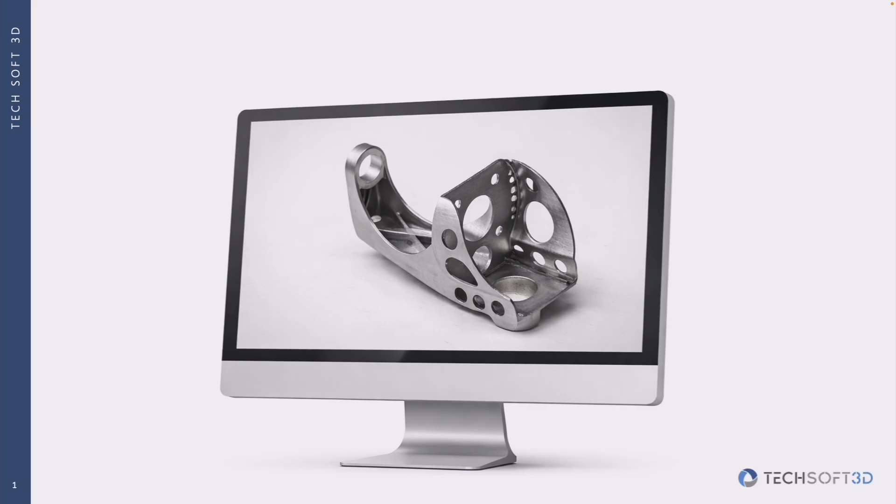Hi everyone. Before starting, I would like you to focus on this part and ask yourself the following question: what would an expert say about this part?

A 20 years experienced engineer could, within seconds, say whether or not this part is manufacturable. What will be the features driving the cost? What are the sourcing options? And what tolerance makes sense?

Most of the time this kind of information is available in PLM systems and other variants, but sometimes the information is unstructured. Companies are very happy to have this experienced engineer who can provide insight to the team within a few minutes. So I have a couple of important questions to ask.

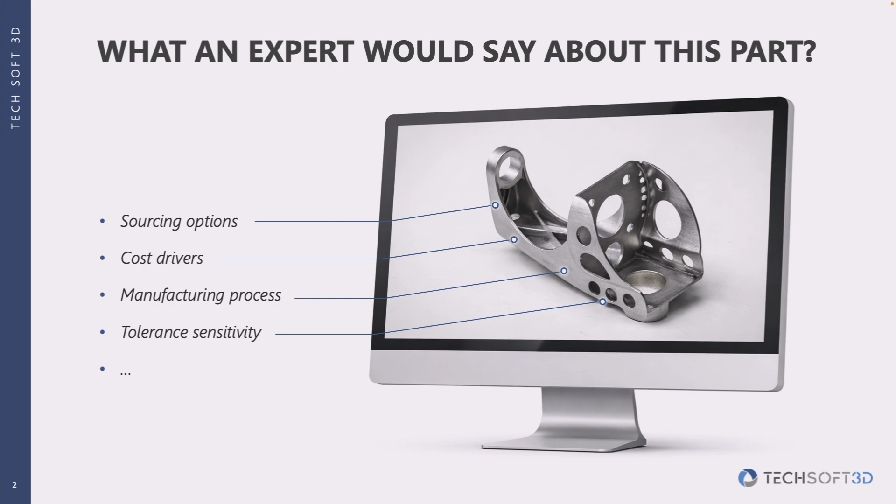How can we connect geometry to that business knowledge? And more importantly, how can we spread the knowledge we have from one part to other similar ones, so that we can turn 3D shapes into actionable business knowledge?

I am Luis. I work for Tech Soft 3D, where I hold the position of engineering manager for the machine learning team. I've been working in AI for the last couple of years, and we have a mission on how we can use AI to add value to the engineering industry.

In today's talk, I will show you how geometry, when connected to manufacturing and business process, becomes intelligence. I will also show you how we developed HOOPS AI, the framework that we have been using for that.

But this doesn't come with an easy answer. There are challenges when we want to bring CAD data into AI. The first thing I would like you to know is that CAD data is not text, it's not an image, it's not a video. So your LLM cannot simply try to do many things with that. We should inject the CAD data into a brain, I agree, but in a suitable format.

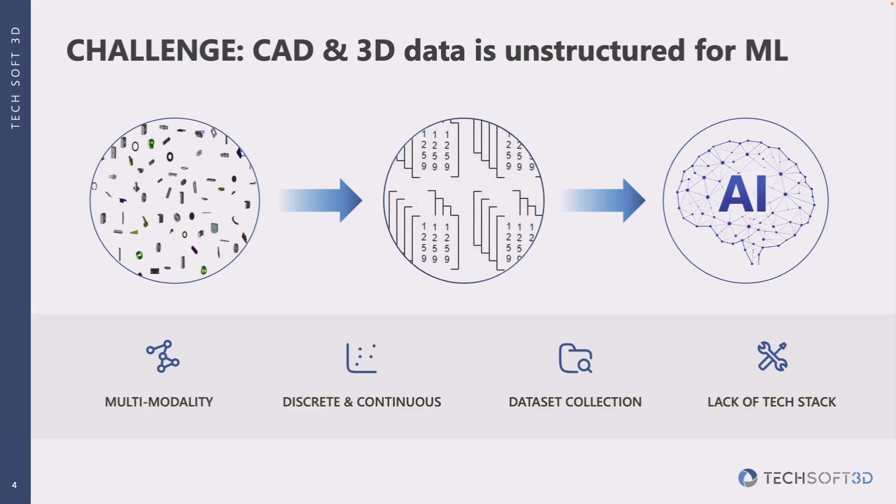Finally, we know that we want to have a tech stack that is capable of handling all of that. But then we noticed that in the community, the ingredients are there: we have tools for opening and reading CAD files, and we have tools for machine learning, like PyTorch for instance. So the ingredients are there, they're just not really connected.

So we created HOOPS AI with that mission. Our vision was to bridge CAD with machine learning, so we can unleash the next generation of applications. There are two main features in this framework: on one side, the CAD data—how we can access it, how we can transform this information into a machine learning or AI-ready input. And on the other side, how we can actually add value.

We need to solve some specific task—what kind of task do we want to solve? Since we are a toolkit provider, among other things, we would like to try to solve the more general problem, not just one simple one.

There was something we kept in mind when building this framework, and that was very clear from day one: we don't want to focus on building a model, we want to focus on building a factory.

Because we believe, like OpenAI and Claude are doing—releasing different generations of models every 6 months—the same will happen in this kind of structure. We will get a model, it will get good results, then we'll have a second version. So the best approach is to have this factory that is capable of generating an advanced model.

And it's also important that CAD data and your data remain private. We cannot access it.

So the tool needs to be ready for you to use on-premise with your own data. And that's one of the key factors that we use to develop HOOPS AI.

Fortunately, for solving that problem of how we can inject the CAD data, there is a scientific method: this geometric deep learning framework. This framework, which is state of the art, tells us that in order to inject the CAD data into a machine learning input, we should transform the data into more representative vectors.

We call that an encoding transformation. We can see here, for instance in the middle, what kind of data we extract, the face adjacency graph, or some other more sophisticated matrix and graphics, so that we can get finally to the machine learning input that an AI can understand.

Then you want to focus on implementing the extraction and transformation of what we call the ETL pipeline. We want to play the same for the CAD file, so we transform the CAD into a machine learning input so that then you have all those libraries that are very powerful to use and to actually learn something.

The transformation in the middle, we just take care of the parallelization. We do it in an optimized way. We know we can't load all data in memory. This is all very clear, very transparent. We get our first dataset.

In this video, I will be showing the output of this first part of the presentation, which is how when you prepare the data, you explore the 1000 CAD files. Basically, you explore it by filtering. You will click on some kind of labels, some kind of specificity, and try to visualize here.

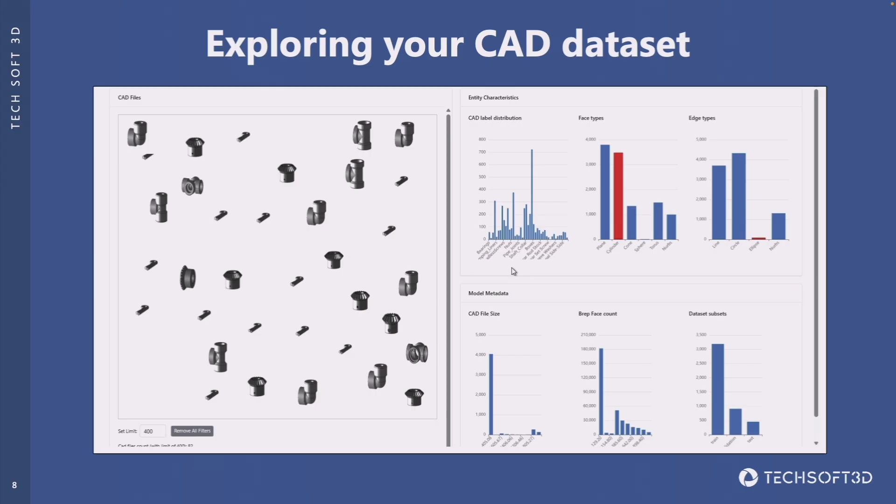Here, I am showing at the left what a mechanical engineer will see, a mechanical part. In the middle, we have the face adjacency graph, and at the right, we have a point cloud discretization. This is a basic encoder, something known in the literature.

We filter them now, we focus on the BRep one, and we're working on this one. For each node, you can attach some attributes: areas, the loop count, and other extra information. You can see how by clicking on the node, it is connected to the CAD.

So I am basically translating that: the left is how a human will read, the last two are how an AI will try to read. And this is just the first part. We have encoded CAD data, and this is our basic encoder.

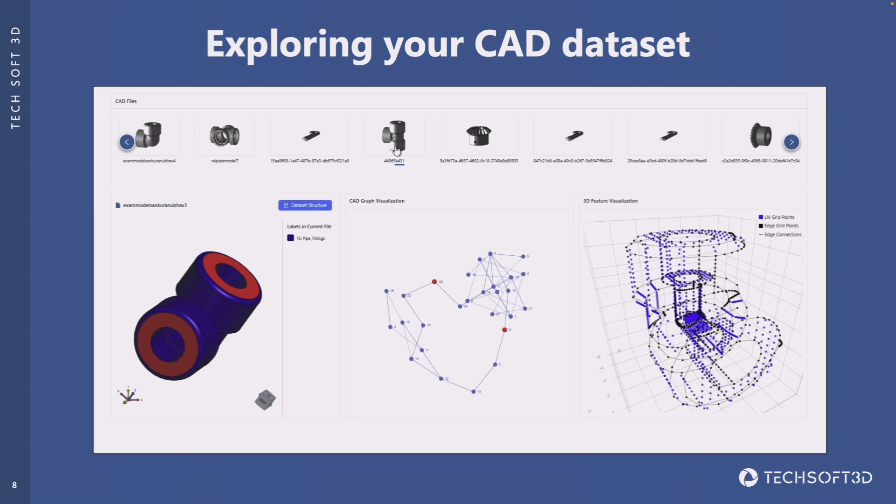I'm going to move to a second example, just to show you that this graph becomes completely different, because the graph grows with the face count. And also we have the discretization.

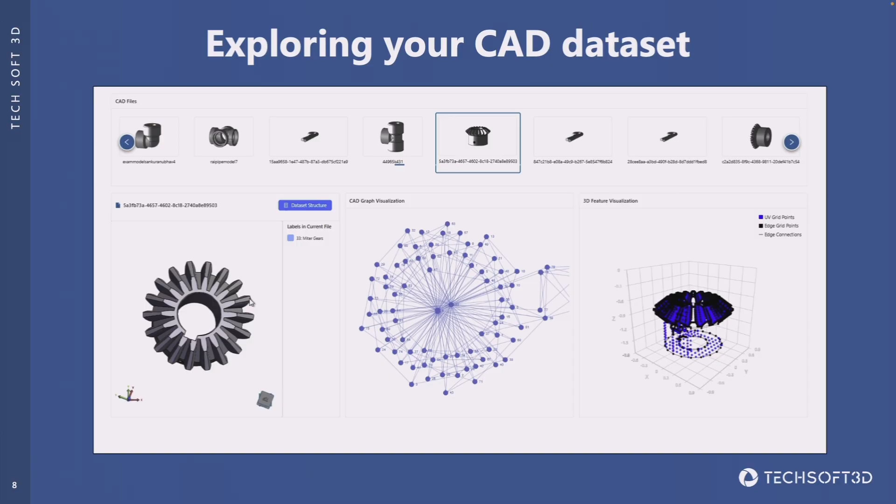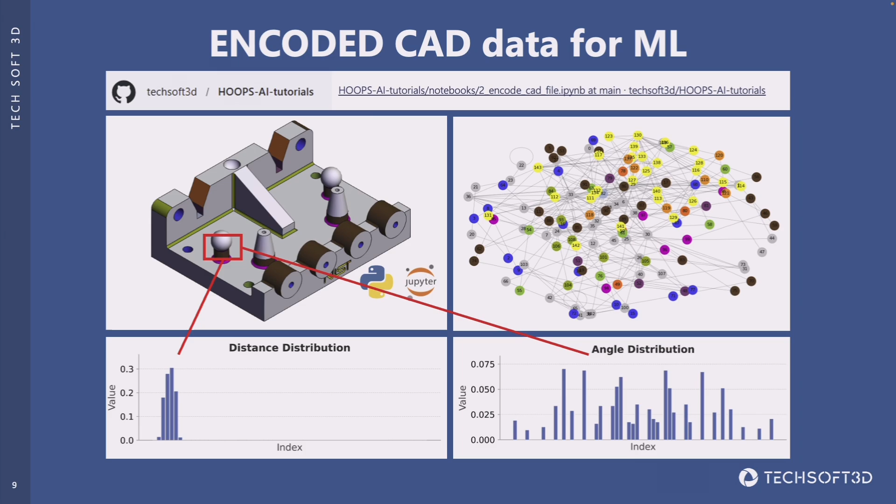At the same time, the angle distribution is telling me these are not two coplanar faces because there is not only one angle looking at them. So there is a distribution of angles, meaning the faces are regular. This is the kind of information that we encode to generate that into the AI.

So now that we have solved this first problem, how we know how to inject the data to the AI, we need to come back to our original statement: how we can build shape intelligence based on that.

So the first thing we do to evaluate our framework is we use a proprietary architecture, something that is re-implemented in the state-of-the-art, and we solve two well-known problems: part classification and feature detection.

Basically, this is supervised learning. You label your data, you train your model, and in the part classification problem, for instance, the model tries to give you a prediction within the spectrum of the data it has seen. For instance, on the left we train with 45 part labels, so the AI will always give you a probability on that prediction. And on the right, we do the same with the faces, so we can predict manufacturing features.

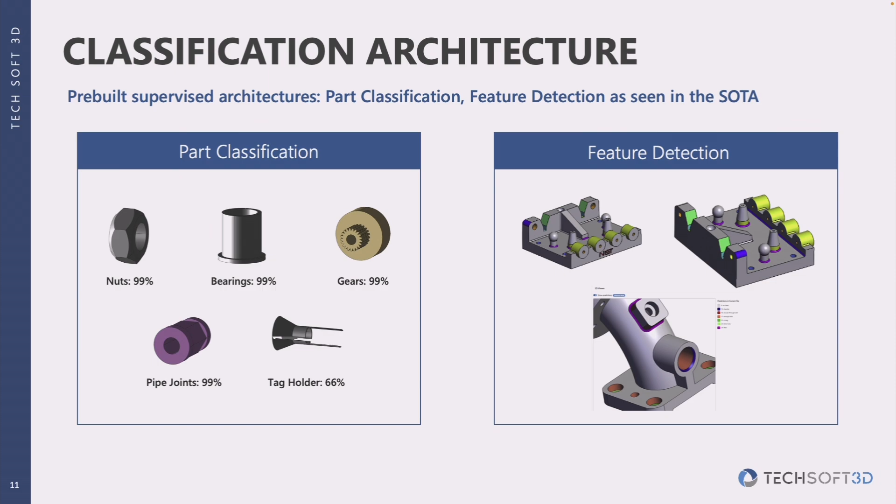While these results were impressive and also built state-of-the-art performance, there are limitations. This requires labeling data, and it requires solving one specific problem. If you change the supervised task, you need to train and solve the problem again, and you also need to label a lot of data. And labeling data is expensive. So supervised learning requires labeled data.

So we had an idea: we need to solve the problem differently. What about we scale beyond that? What about if we teach the AI not to perform a specific task, but to learn the language of shape, so that we can scale without labeling?

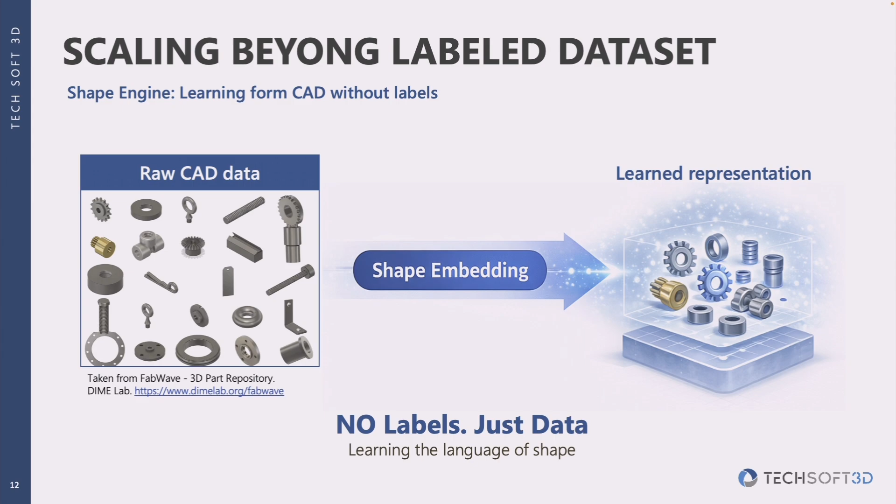So the concept is very simple, something taken from what is common. We take the data and build something in the middle that will generate the shape embedding, with two premises: shapes that are similar should be closer, shapes that are not similar should be further apart. The intelligence you put in the model in the middle is what makes the whole difference. At the end, the learned representation will help you avoid using labels, and then you can adapt to your specific task. While supervised learning scales with labels, unsupervised learning scales with data, and data is available.

So what kind of things can this unlock? This unlocks a new challenge, a new kind of value. Imagine on the left you have one part, and you manage to retrieve the 5 most similar parts in your database. The value of understanding shape now becomes finding similarity.

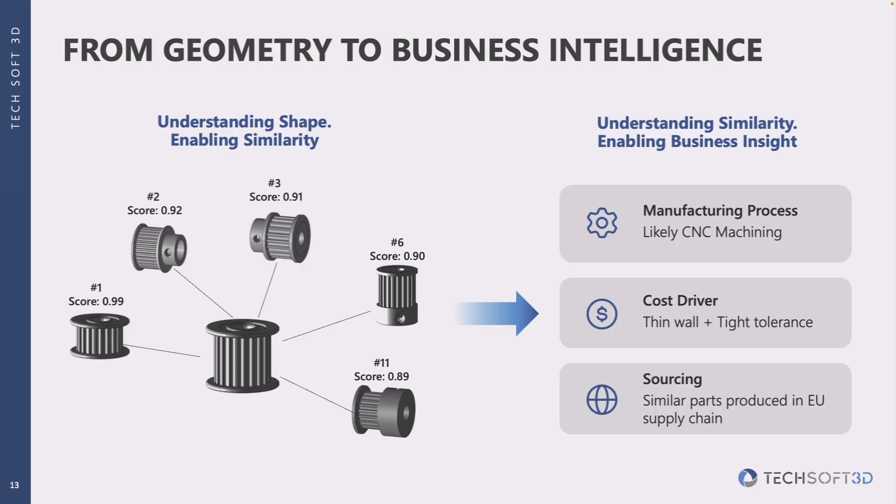But what happens when you have attached to this part all this information - the manufacturing process, the cost drivers, the sourcing? Then you move from understanding the shape to enabling decisions, and you can compare or spread information among the parts.

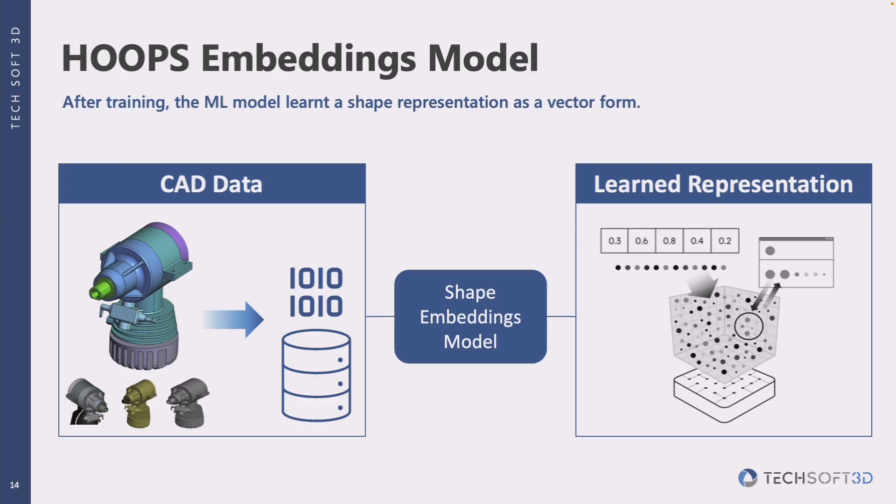Based on that idea, we have developed and made available in our toolkit something called a HOOPS embedding model. A very simple model: we put something in the middle that we pre-train with a lot of data, so that these learned representations are effectively learned, respecting the two premises that similar shapes are close and different parts are far. The logic is basically to learn from that.

To prove this, we took a training dataset which is a public one at large scale - the large scale ABC dataset. It's about 1 million CAD files. I don't believe all of the parts are labeled, but in this case we don't need that label.

So we took all this data - you can find this reference - and we trained this HOOPS embedding model for the show. The training was done on a GPU machine with 4 GB RAM, and it took more or less 1 week. That is something that can be accelerated.

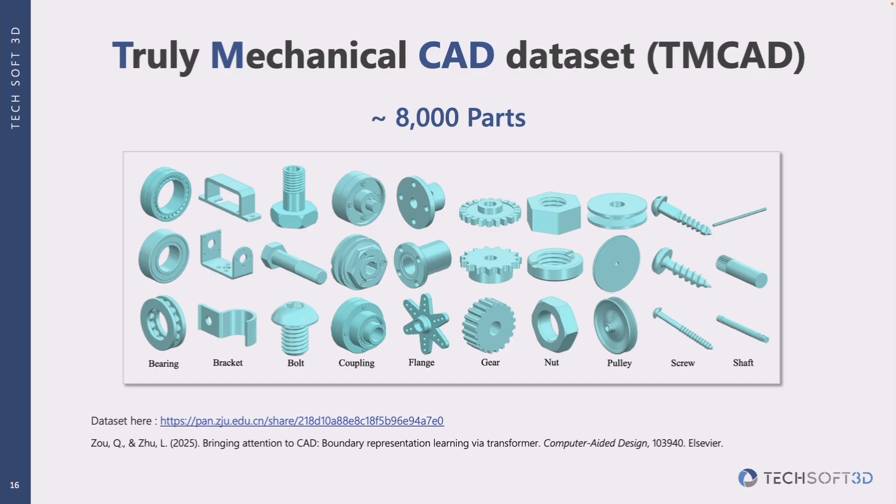Once we have this pre-trained model on that public dataset, we use a second public dataset to test it. This dataset has 8,000 parts. It's from a recent publication called the Truly Mechanical CAD dataset - this is version 2, by the way. This dataset has some labels, but in our work we remove those because we're finding similarities, and we want to test how the model performs on this new dataset.

But before doing that, I need to show the full pipeline of how we find the similarity. We start from the dataset, use the pre-trained model, and compute all the embeddings, the vectors, one per part. In the end, I have 8,000 parts.

We will index those vectors into a vector store that is optimized for retrieval. In this example, we use FAISS because it's available in Python. This idea is coming from RAG, it's just that instead of my embeddings being text embeddings, my embeddings are shape embeddings.

When we have done that offline, then we will do the dynamic part, the online mode. We will take a query part, recompute the embedding model, and it will be a vector. Now, in that embedding space, we retrieve the parts that are similar. The embedding vector of the query will go to that space, find the closest neighbors, and those closest neighbors are going to be given.

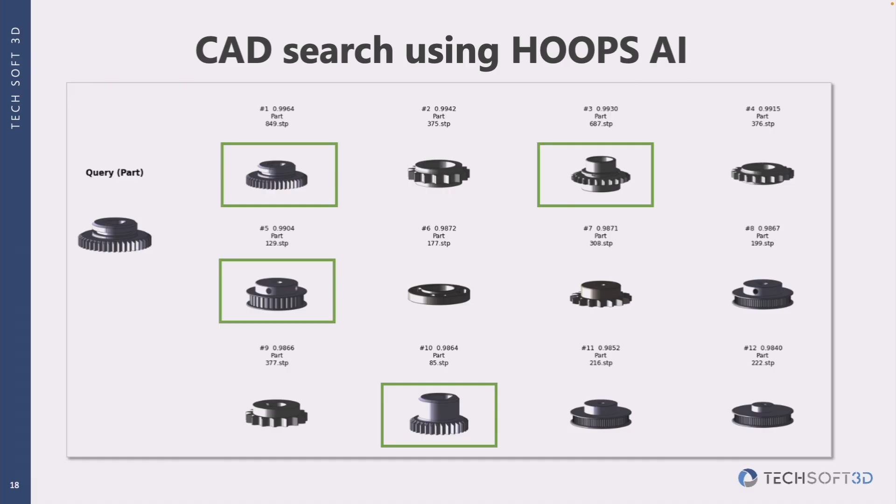Here's an example. We have a query part, and recall the dataset is 8,000 parts. These are the results it finds most similar for the version we have right now. We can see some files that are very similar, but also we need to define that the similarity is a non-objective proposition, so we need to try to figure out what the model is really looking at. But here we can see a similarity score, and we see how the model has found almost the duplicate at the first top, and also parts that are similar.

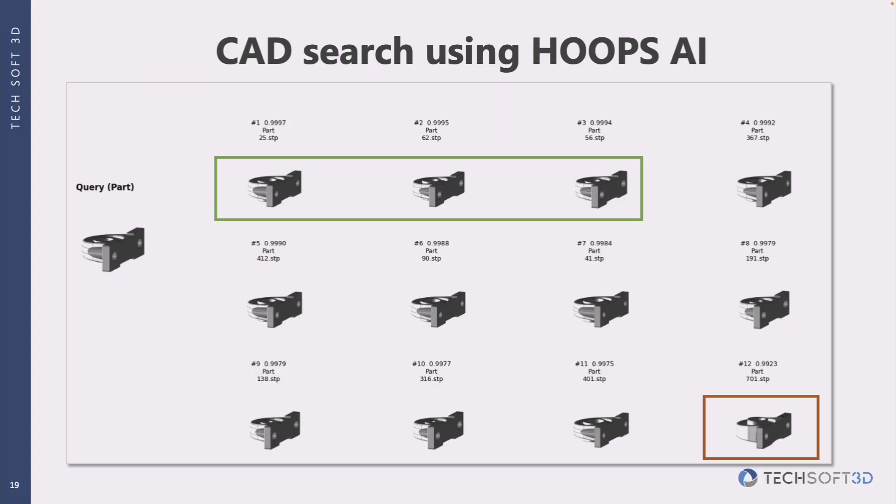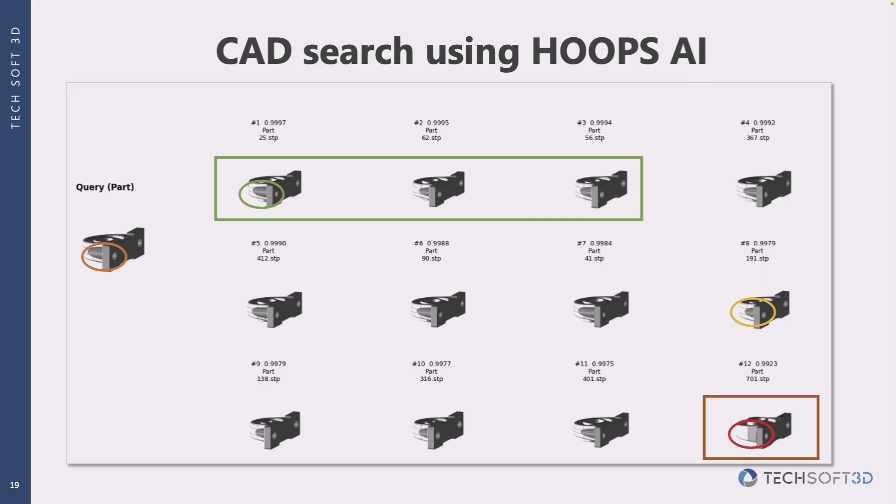I have a second example. In here, the dataset has a lot of basically duplicated models that have slightly changed a little bit. So I can say that the first three parts are mostly the same, and we can see a difference in the last one of the retrieval. The difference is that this feature we have in orange disappears in the first, is different on the other two. So we can see that's what the model was looking at when looking at the similarity.

So now what can we do with this? Because this kind of similarity is now capable of working without supervision, you don't need labeled data, and you can also retrieve that. Imagine I do the same query as before, but now this part has some information of the source, in some kind of email, some kind of metadata, in some kind of building system. And there's another part that has basically the information on the manufacturing process, and another might have the cost driver.

The next step is to now build an engine on top of this that we can infer information from the other similar parts based on what we know and what we have. What is important here is that the shape similarity didn't need all of that to be trained. And all the data you will be appending day after day will still be available in this workflow because there is nothing being trained hereafter.

Also, what is important about the toolkit is that the model can be trained on your data. You need to reuse that pre-trained model so that you can have better results for your data.

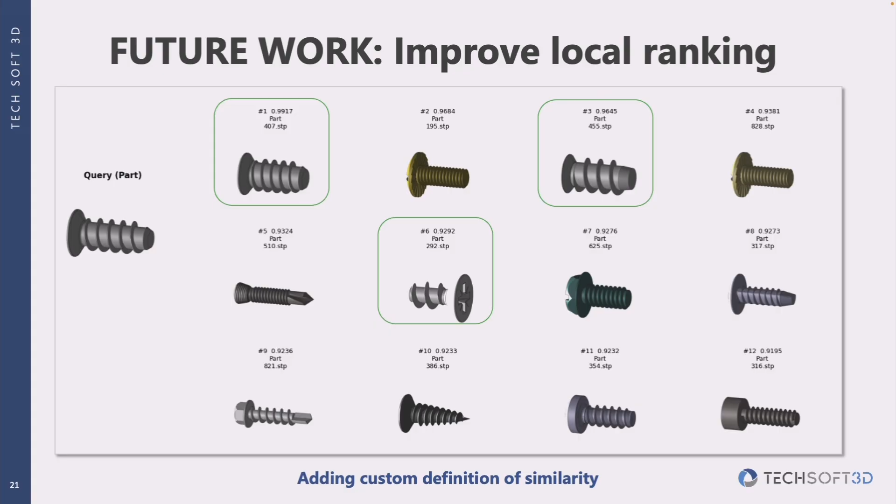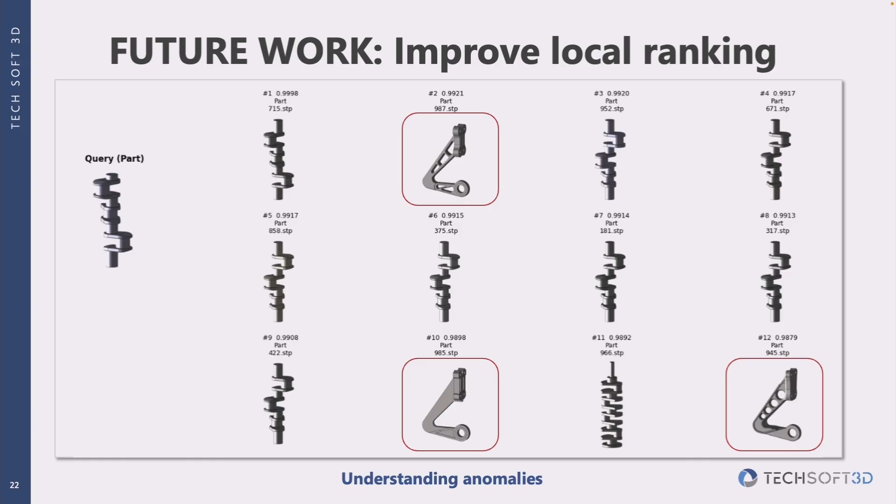Also, in our journey of exploring machine learning, we would like to improve this kind of anomaly we see, which is a very interesting anomaly. In our premise, we mentioned that we wanted similar parts to be close and not similar parts to be pushed away. What we notice in this anomaly is that we have two clusters, because the three anomalies resemble each other. It means that there was something during training that made these two clusters come close, and when I'm doing the query, I got this kind of information. So we want to also add this understanding of anomaly.

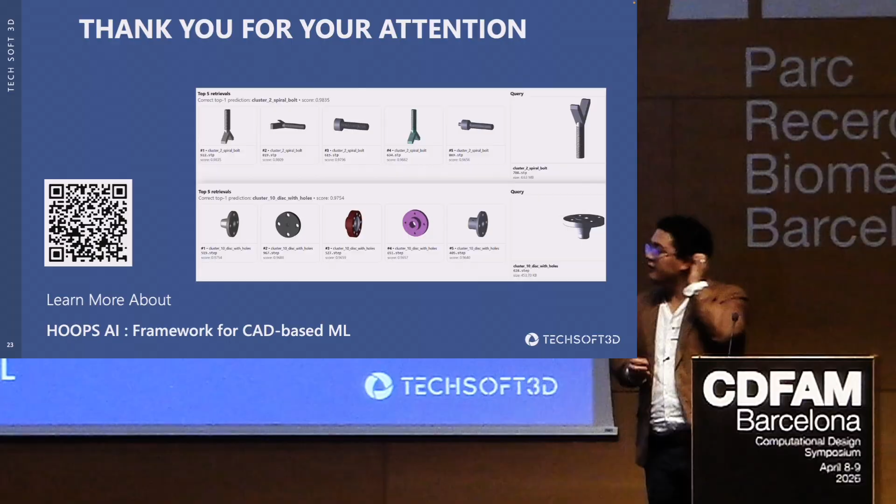Finally, I would like to thank you all for your time, and I'm showing here some other results. You can find us at the coffee, and please scan the code so that you can have an overview of HOOPS AI, and you can pre-train the model yourself. Thank you so much.